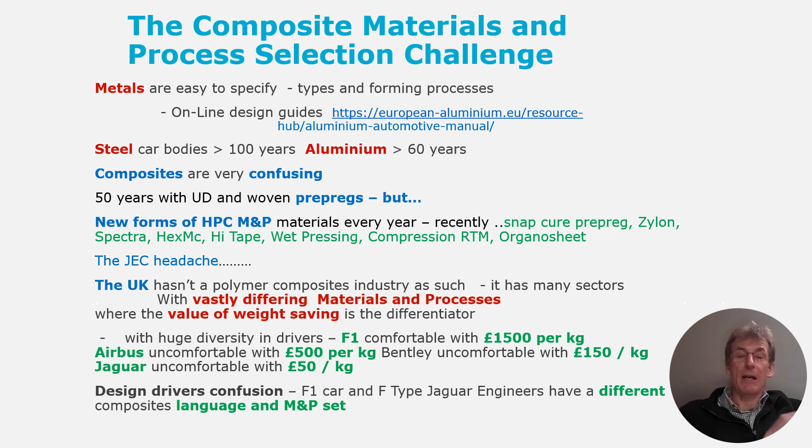The tool, I guess, had three envisaged users. At one end, a very quick director's strategy study, how to move into higher volumes, how to move into new sectors, look at the available options at hand. Young engineers who are tasked with looking at new structures, a few days of lecturing from Bristol, Imperial, Cranfield, but how to impart them with a body of knowledge to help make informed decisions.

Perhaps most usefully for those engineers experienced with composites, how to move into new markets using new materials, introducing materials that are relatively unfamiliar. They would all benefit from an interactive tool to rapidly examine applications relating to the whole field of materials and processes. The tool suggests both materials aimed at weight saving and materials and processes aimed at reducing manufacturing cost. So that's in a nutshell what the tool does.

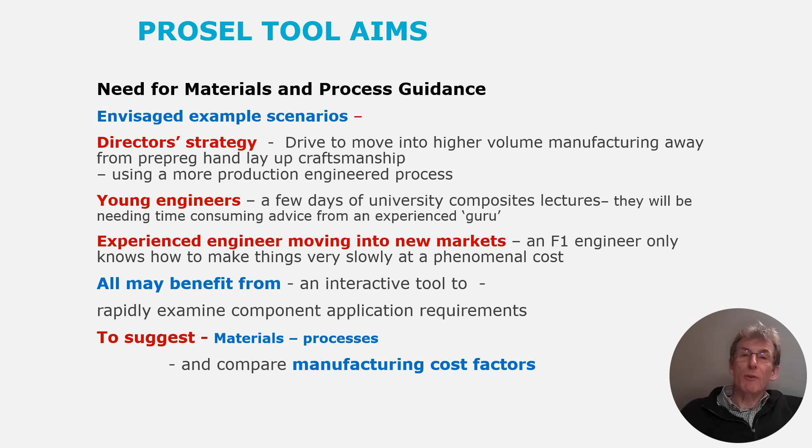So how we built the tool. It's a systematic approach. The tool is informed by the creators, 40 years working in the industry, and the challenges and benefits from new materials, design constraints, production issues, complemented by 3 years of pretty detailed conversations with specialists from part builders, part designers, material suppliers, to essentially build up a body of knowledge to be available to new applications.

We're looking at various aspects. We're looking at process capability, shape, surface finish, part details, manufacturing characteristics, layup rates, ability to tailor layups for weight saving, whether we're looking to build things fast or slow at a rate. It's incorporating performance: stiffness, strength, impact resistance are all built into the tool. The issue of tooling requirements and cost, where different tools fit for different applications, different volumes, are embedded.

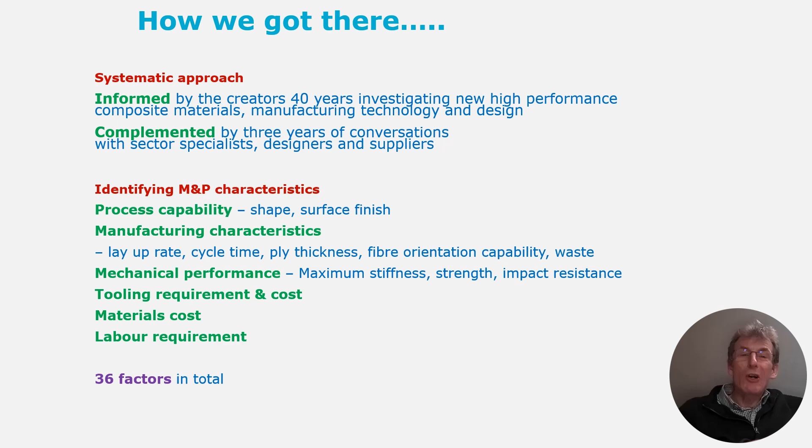Materials cost and labour requirement. These are areas which are very difficult to establish, very little published in the scientific world. This is really through conversations with suppliers and manufacturers to build in a body of tacit knowledge. 36 factors in total are embedded, but all correlated and arranged in quite a logical way.

How does it work? Well, we've got a set of around 200 materials and process options, from the well-established prepreg hand layup autoclave through to stamping of thermoplastics, pultrusion, all the new techniques. These are essentially posted on a wall. Imagine a wall of post-it notes. And as the tool asks you questions about your part or application, we're actually peeling them off, binning them as they fail to meet what you're trying to build.

All being well, we're left with some options which are likely to be able to build your part. And from those options, the tool runs two routines, one looking at structural stiffness. So for an equivalent stiffness part, what would the comparative weight of the structure be using all these options?

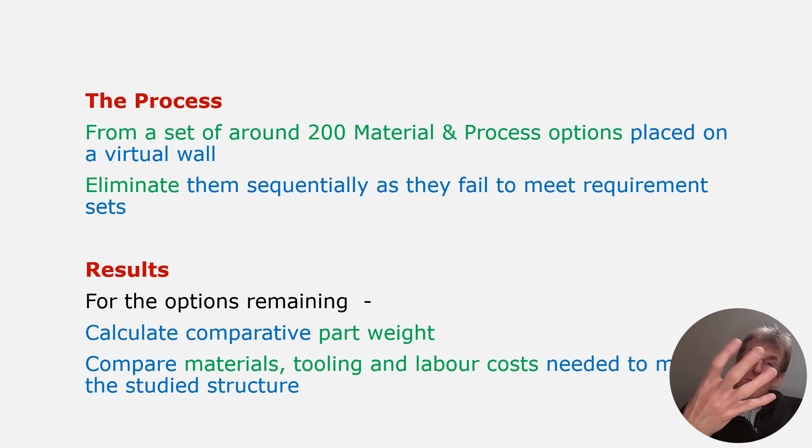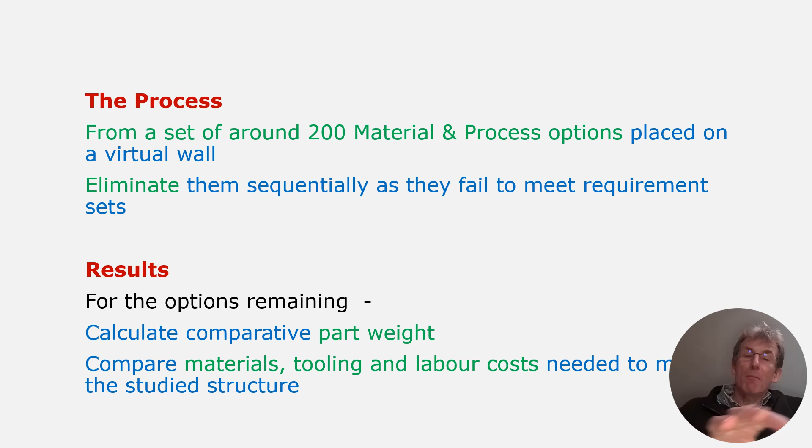And then a costing routine looking at materials cost, waste, tool cost amortized per part, and labour, both supervision of automated cells through to laborious hand labour that's needed to build your particular structure, but all contained in a tool which is very, very quick to use.

I did this cheeky slide for a conference, and that's to say, in today's world, we have a massive headache trying to work out how to pick better materials. Lots of discussions, lots of delays and confusion. But if PROSEL works well for you, it's bringing in a huge field of capability data, rationalizing that into a nice, simple and clear way forward.

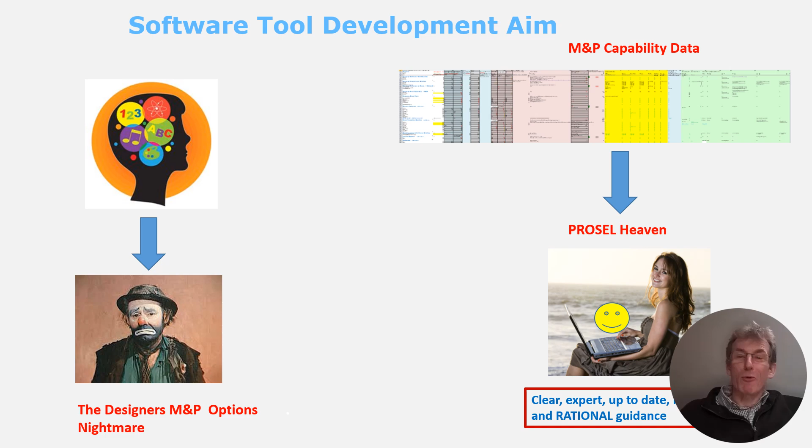Here's what the tool looks like. This is the home page. So we have a brief introduction, the team building it, and all being run through a simple dashboard. You'll need to set up a login, very simple, and I'll basically see who's adding into that login list, and then I give a quick click to authorize access, and away you go.

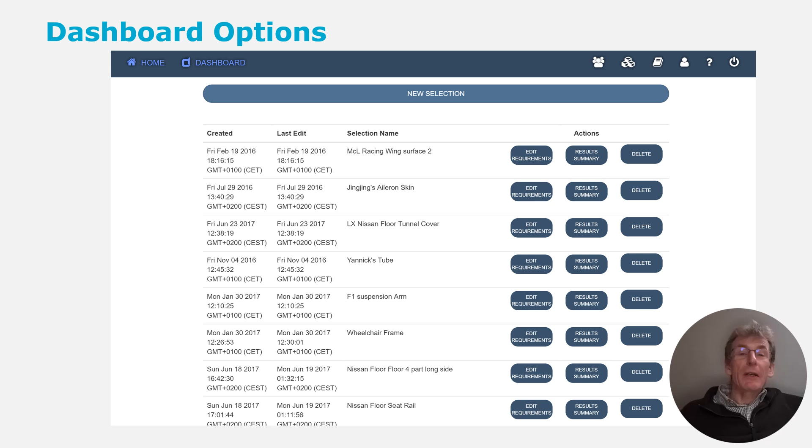Here's a screenshot of my kind of home page. These are a long list of application studies, and to set up a new one, simply click new selection and then follow the tool through.

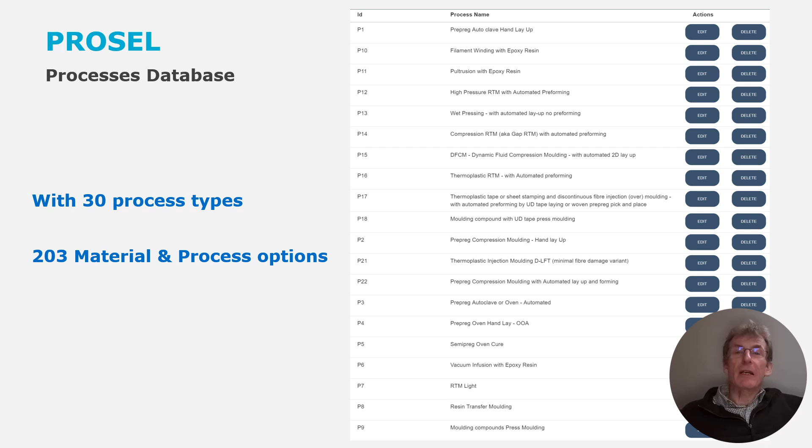And alongside that, coming up next, a critical factor for us is choice of mold tooling. Really confusing area. Good differentiator between a successful and a difficult project. And we have around about 15 types of tool, ranging from single-sided machined steel, tooling block, prototyping, wet layup, glass fiber tooling.

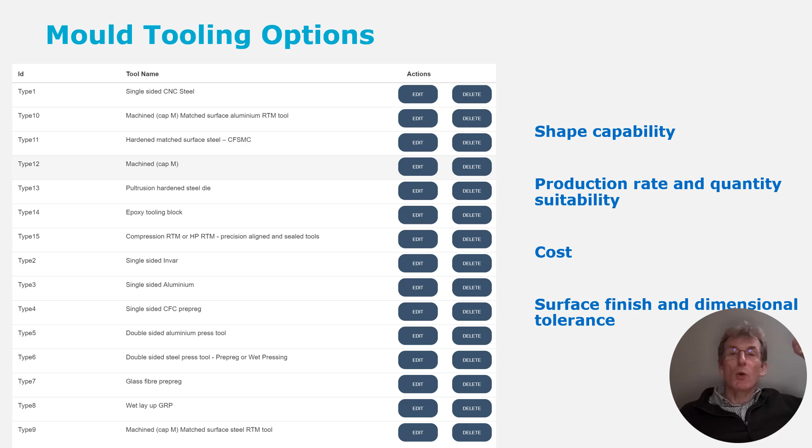The highest cost of which would probably be compression RTM or high pressure RTM, precision aligned, massive press-based tooling. These have basically a set of attributes: shape, surface finish, and investment cost. So quite a useful database embedded there.

The process of working out the materials and processes that could be useful goes through 5 stages. First being shape and quality. So in terms of what you're looking for in terms of geometry, size of part, surface finish accuracy, and that's where to start. Put in all the dimensions, and that's basically the first set.

The second stage is what kind of weight saving and reinforcement tailoring you're looking to do. So imagine an Airbus wingskin engineer trying to tailor the most highly optimized, smartest, lightest structure they can achieve, through to, say, a car roof, how to bash it out fast. So what sort of weight saving you're chasing. Production rate is obvious, an absolutely phenomenal differentiator for us in terms of process techniques. So how many you need per year, how many altogether.

Assembly options. Generally, the more parts you build, the faster you want to assemble them. And we have options about whether we co-cure parts together, whether we embed inserts, whether we want matched surfaces, such as by RTM, and ask you what you're looking for there.

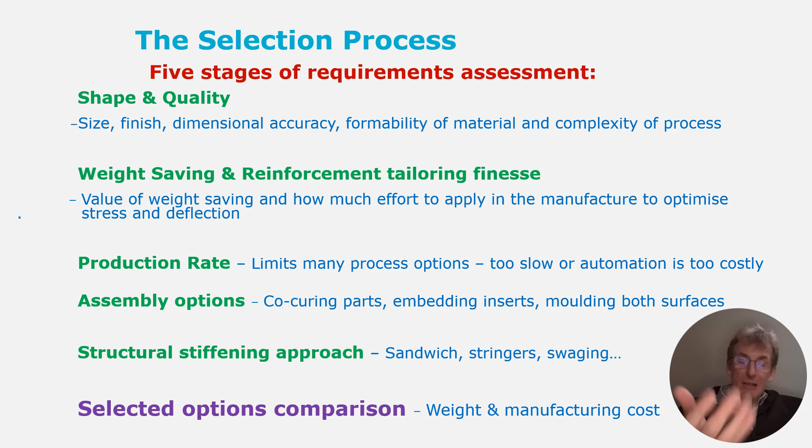Quite a confusing area is structural stiffening, where we have simple shell structures, whether we choose stiffeners, swaging for part stiffening, foams and honeycombs. We can ask you what you're trying to do there and select materials and processes appropriate to those. And then it uses the embedded information to give you a weight and manufacturing cost comparison for the processes it recommends. So here's the first stage of the requirements definition.

And we have a series of questions on the left, which we're basically going through in turn. On the right, we have this list of, at this moment, 203 process options. And as you go through the questions, it's then reading across to see which of the 203 could or could not build your part. So we have questions of size, thickness, surface finish, radii you're looking to achieve, thickness variability and warpage, a tricky area for us. And at each stage you click submit, and then again it just throws away several or many of these options.

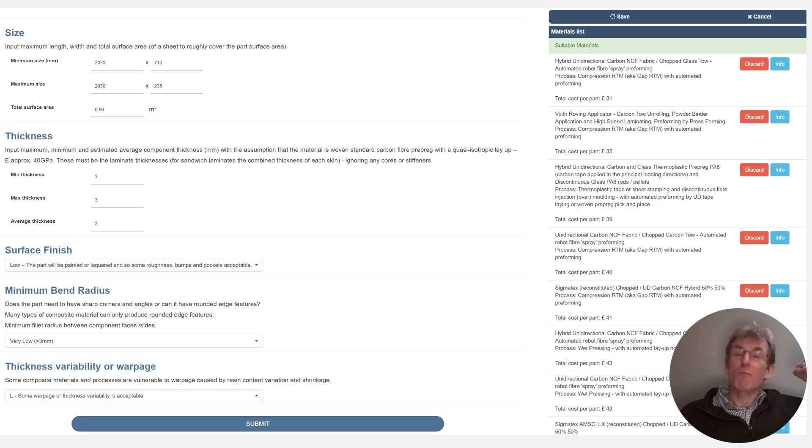The second stage of selection involves weight saving. So it asks you about the loading on your part, strength issues, lay-up angle complexity issues, how you want to tailor thickness. Any of these questions that aren't relevant to you or you don't want to deal with at the moment, you just leave them blank. The tool doesn't care, but it helps you refine things to a level.

We have a simple and an advanced version. This is a shot from the advanced screen. That will become clear as you're using it. You see here that this is the bottom of the selected list, and then gradually through this process, as we answer the questions and press submit, the rejected materials list grows longer and longer.

This is stage 3, about production rate. How many per year? How many altogether? Assembly options, embedding inserts, co-curing, again differentiating the useful from the unhelpful processes.

Each of the materials and process options has an info button, and that info button will say what the features, i.e. benefits, and also the disadvantages of these options are. It'll also say, when you're in the rejected list, why the tool has rejected them, so you can go back and interrogate what's gone wrong, and essentially give you more understanding of how the process is working.